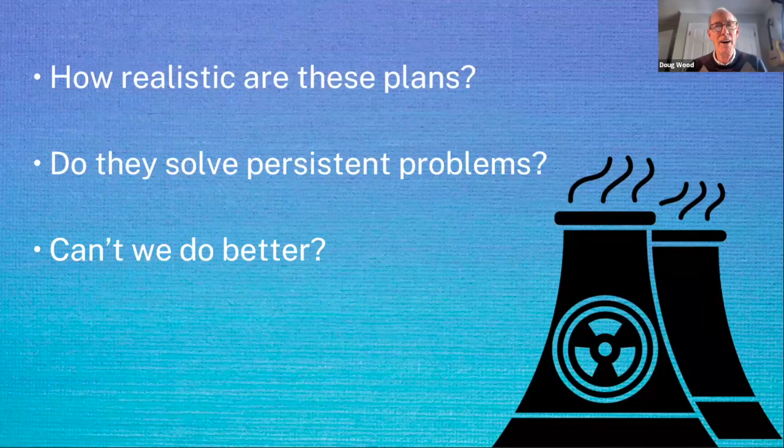This webinar is an opportunity to step back from political talking points and examine the evidence. How realistic are plans for small modular reactors in terms of cost, construction time, or safety? Have any of these new ideas solved the long-term risks that have always plagued nuclear power, like what to do with nuclear waste? Shouldn't we really be talking about better, faster, safer alternatives available to New York that can help us meet our future energy needs without jeopardizing our health, our safety, or our children's future?

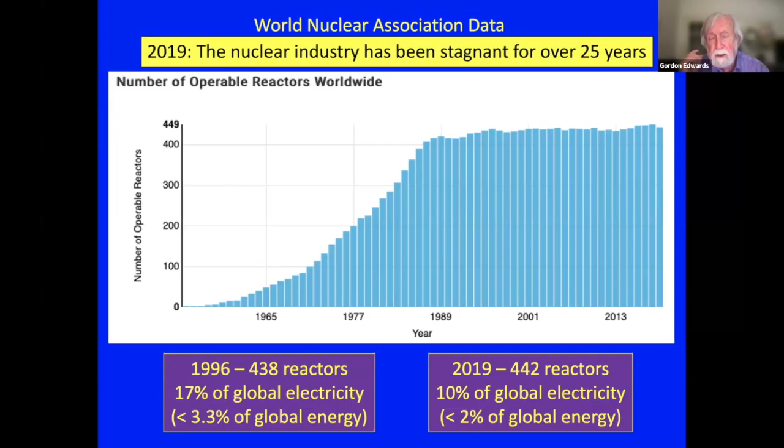And meanwhile, the share of nuclear as a share of global electricity use had declined from 17% to 10%, and now it's gone down to 9%. It's still going down, and nobody expects it to reverse itself anytime soon.

In 2019, the American Society of Mechanical Engineers made a statement: the International Atomic Energy Agency, looking ahead to 2050, sees the most optimistic global electricity market share for nuclear as only about 5%, down from 10% today. In the United States and Europe, it steadily declines to between 3 and 5% of the market, constituting a potential for market failure.

In other words, nuclear can just price itself out of the market altogether. The first nuclear renaissance was around 2001, in response to this sad state of affairs for the nuclear industry. They knew they had to do something to revitalize the industry and get it going again, so they declared there was going to be a nuclear renaissance, with hundreds of new reactors built around the world. But in fact, only a few were ordered, and there was a litany of failures in connection with those attempts.

The bankruptcy of Westinghouse occurred in 2017. They had $9 billion in losses from new nuclear projects, mainly the four AP1000 reactors in Georgia and South Carolina. These were the first reactors to be ordered and licensed for construction in a 30-year period—there had been a 30-year drought up to then. The U.S. federal government had given $8.3 billion in loan guarantees on the financing of the four reactors.

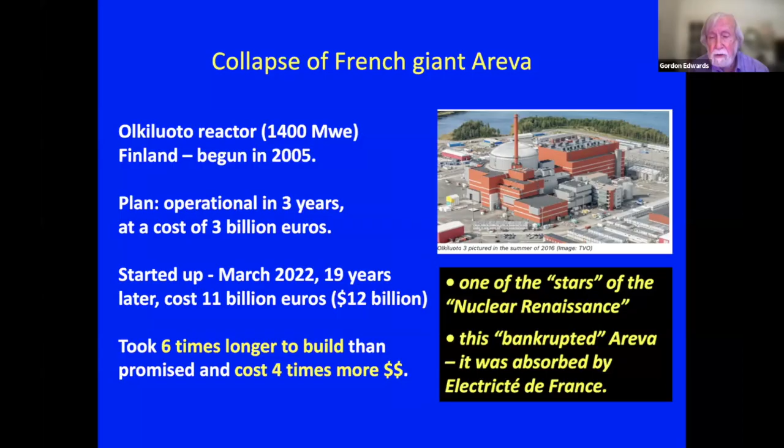This is one of the stars of the nuclear renaissance, and it bankrupted Areva. The company had to be absorbed by Electricité de France.

Let me say a few words about nuclear fission and why certain issues are endemic to it, no matter whether you have a large plant or a small plant, no matter what the technology, fuel, coolant, or design is. There are certain things about nuclear fission which are fundamental.

Henri Becquerel in 1896 discovered radioactivity. He discovered that lumps of uranium ore or thorium ore taken from the ground are radioactive—they give off an invisible ray which will expose photographic plates even if they're wrapped in thick black paper. He didn't understand where this energy came from. You can't see radioactivity, but if you put one of these rocks in a cloud chamber, you can see the condensation tracks of the radioactive emissions given off from uranium or thorium ore.

The amazing thing about this energy pouring off the rock is that it has been going on for millions and millions of years without stopping, 24/7, day and night, constantly pouring out. It wasn't too difficult for scientists to calculate how much energy that was if you added it up over a few thousand years, and it was clear it would be enough to cause major damage to the Earth. And in fact, it did later on.

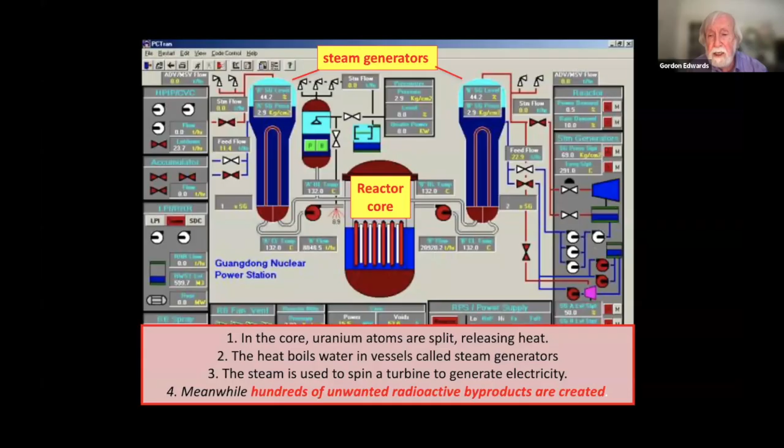Now, it was also discovered that we could harness this energy. We could build a nuclear reactor and keep the chain reaction of uranium going so as to harness the energy to boil a lot of water. That's basically what it is—a way of boiling water and using that steam, just as in a coal-burning or oil-burning plant, to turn the blades of a turbine and generate electricity. The difference is how you boil the water.

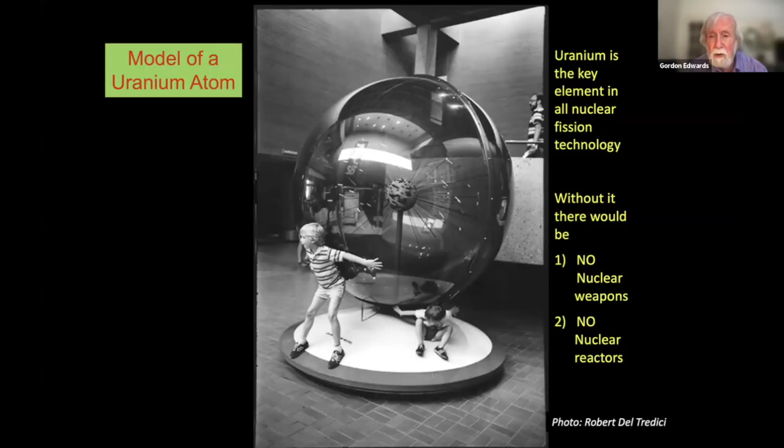Now, uranium turns out to be the key element in all nuclear fission technology. Without uranium, there would be no nuclear weapons of any description and no nuclear reactors of any description. So uranium is the key.

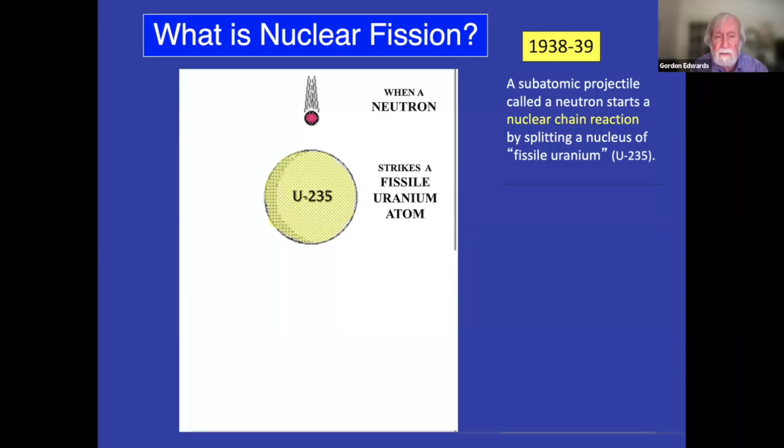And nuclear fission was discovered a lot later, only around Christmas time of 1938, during the holidays between 1938 and '39, when a neutron strikes a fissile uranium atom. That's a rare kind of uranium called uranium-235, only 7 atoms out of 1,000. When you mine uranium out of the ground, 7 atoms out of 1,000 are this type. But that's the kind needed for a nuclear chain reaction, because when a neutron strikes one of these atoms, the atom splits into 2 smaller atoms, which are highly unstable and therefore intensely radioactive.

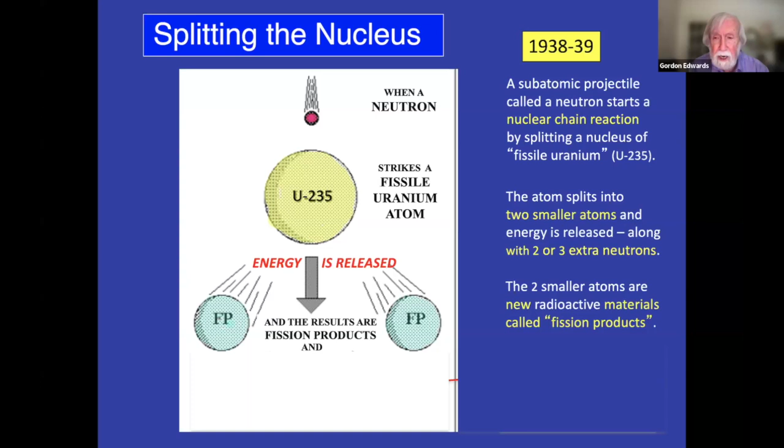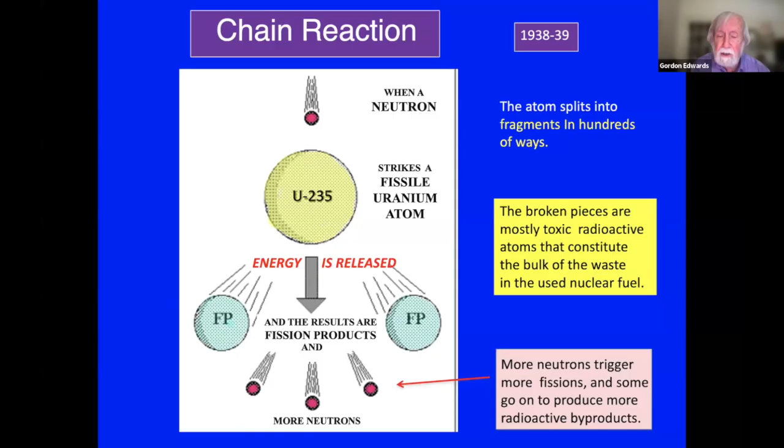The result is energy is released and fission products are created, which are the bulk of the radioactive waste from nuclear reactors, and more neutrons are given off. Those extra neutrons are important because they trigger more fissions and maintain a nuclear chain reaction, whether uncontrolled, as in an atomic bomb, or carefully controlled, as in a nuclear reactor. Some of those neutrons also go on to produce more radioactive byproducts in addition to the fission products. So what do the extra neutrons do?

Well, as I said, they keep producing fission products. Every time an atom splits, you have 2 radioactive byproducts, fission products. But they also turn some of the uranium into plutonium. In fact, the uranium that doesn't split becomes heavier and becomes a transuranic element, which we don't find in nature, called plutonium, americium, neptunium, and a number of other names.

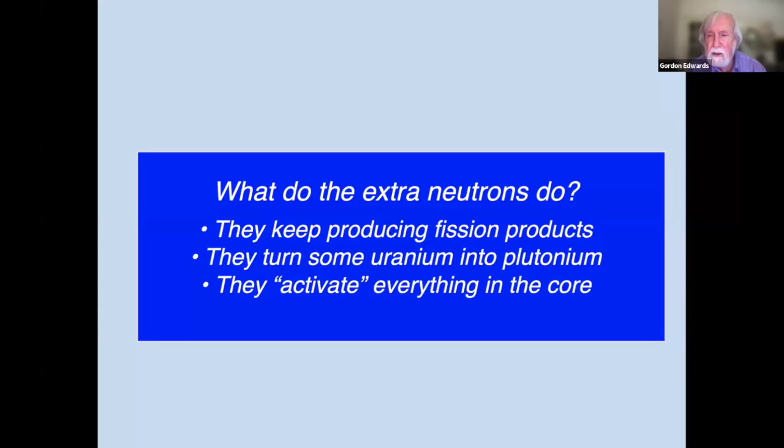In addition, these extra neutrons collide with non-radioactive elements that are just sitting there in the concrete and steel of the reactor itself, and turn those atoms into radioactive atoms. These are called activated atoms. So radioactive atoms are created right in the makeup of the steel and concrete, and that's why decommissioning a nuclear reactor is very difficult.

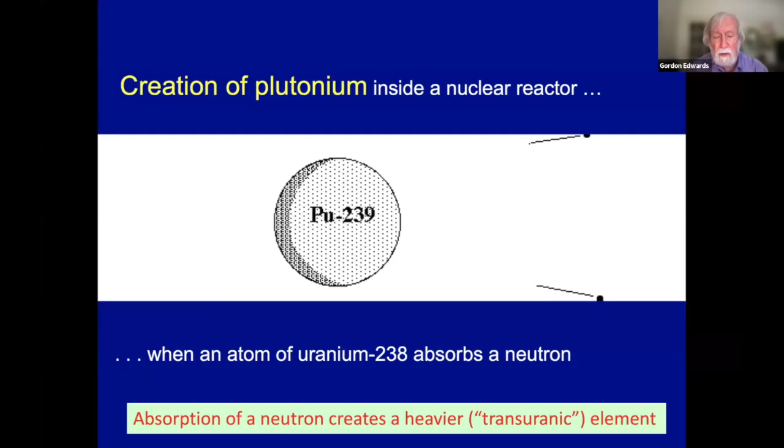But one of the most significant things is that when a neutron hits a uranium-238 atom - uranium-238 being the most abundant type, over 99% of all uranium we mine from the ground - when hit by a neutron, it turns into a heavier than uranium atom called plutonium. And that turns out to be a powerful nuclear explosive. In fact, it's the backbone of all the nuclear arsenals in the world today. So those extra neutrons are very important for people who have nuclear weapons programs.

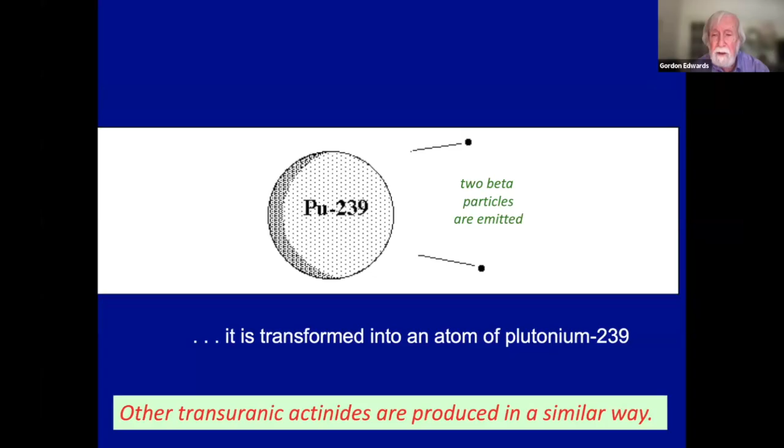That's where they get their plutonium from. In fact, the very first reactors that were ever built were built for the sole purpose of producing plutonium for bombs. Later, it was realized very quickly that plutonium could also be used as another nuclear fuel besides uranium-235.

Now, this glass paperweight is the exact size of the plutonium ball used in the Nagasaki bomb. That's how much plutonium you need to destroy a city - about 6.2 kilograms. It's incredible how much energy is packed into the nucleus of those atoms.

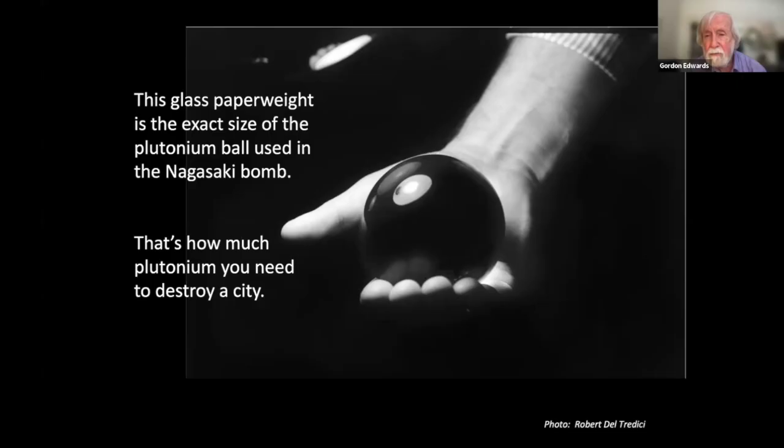The amazing thing is that one of the smallest things you can possibly imagine, the nucleus of an atom, extremely tiny, contains the most powerful force in the universe, which is the nuclear force. And it's liberating that nuclear force that is the secret of nuclear energy.

Now, here's a picture of Howard Morland, a journalist who wrote an article about making an H-bomb, a hydrogen bomb. You'll see that even in the most sophisticated nuclear weapons, there is still a ball of plutonium necessary. This is a fusion thermonuclear weapon that uses fusion, but that ball of plutonium at the top is needed to get the temperature up to 100 million degrees, which is necessary to get the fusion started.

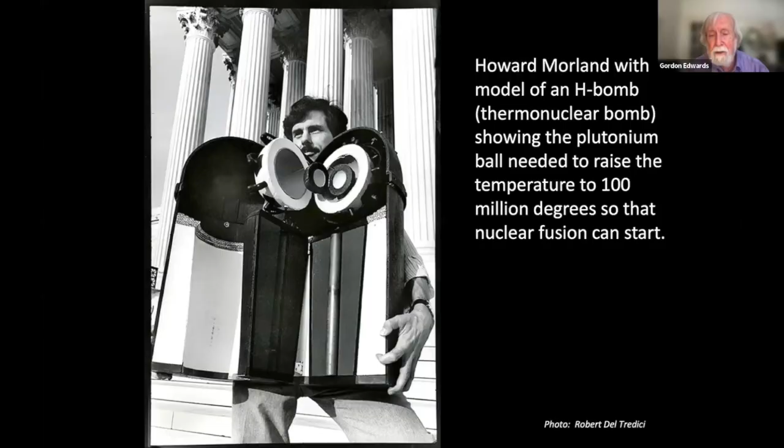So what are the activation products? When a stray neutron is absorbed by a non-radioactive atom, the result is often a radioactive atom. It's called an activation product.

For example, here in Canada, we use a heavy type of hydrogen called deuterium. It's not radioactive, but when it absorbs a neutron, it turns into an atom of tritium, which is radioactive. These are isotopes, varieties of hydrogen. Hydrogen is the most abundant atom in the entire universe, the most abundant substance, and fundamental to all living things. Tritium is the radioactive form of hydrogen, and a great deal of it is made in nuclear reactors and in nuclear explosions.

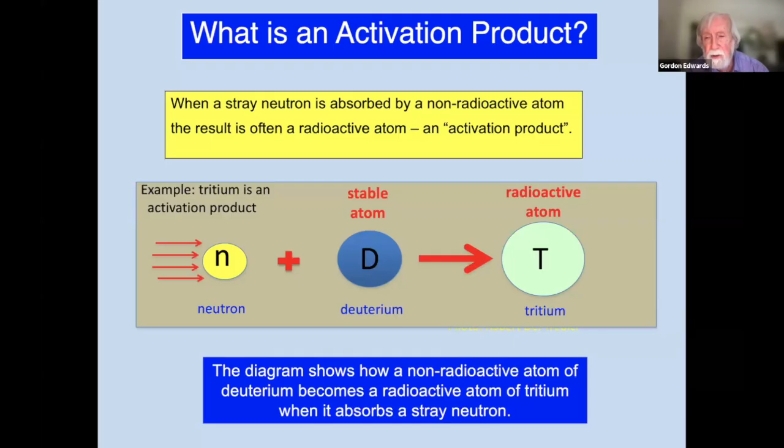Some of it also comes from nature in the form of cosmic radiation from outer space. So there is a background level of tritium, but what is produced here is man-made.

Water is activated and produces radioactive tritium. Air is activated and produces radioactive carbon-14, and all organic molecules have carbon and hydrogen in them. So these radioactive varieties become incorporated into our DNA. Those carbon atoms and those hydrogen atoms can be easily replaced by the radioactive varieties. So we can have this radioactivity right into our own organic molecules.

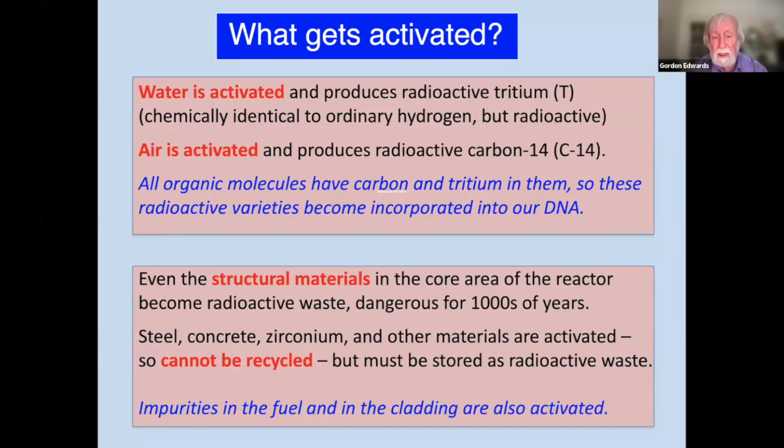Even the structural materials in the core area of the reactor become radioactive waste, dangerous for thousands of years—steel, concrete, zirconium. So they cannot be recycled, but must be stored forever as radioactive waste.

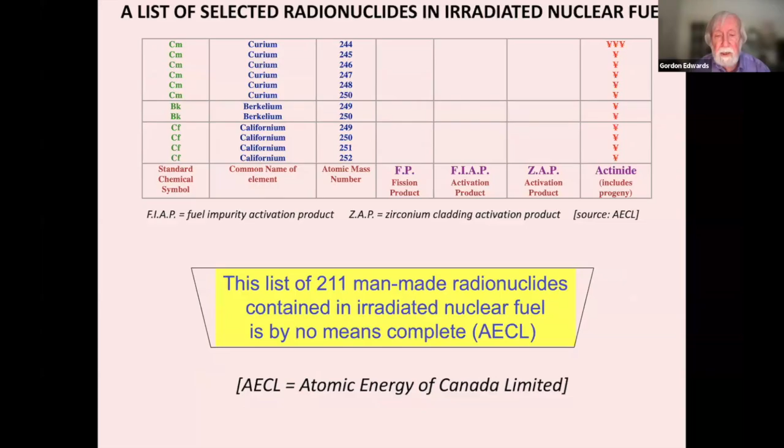This list of 211 man-made radionuclides contained in irradiated fuel is by no means complete, according to Atomic Energy of Canada Limited. And by the way, the radioactivity is so intense that if you wanted to dissolve just one year's radioactive waste from one nuclear reactor, you'd need an amount of water about the volume of Lake Superior to dissolve that amount of spent fuel—called irradiated nuclear fuel—to the maximum levels of contamination for drinking water allowed by law.

So that's why this is a very serious problem. And even after 1 million years and even after 10 million years, the amount of water needed is still very considerable. The U.S. Geological Survey pointed out that even after 1 million years, you'd still need about all the water in the Great Lakes to dissolve the waste from American reactors to the maximum level of contamination allowed.

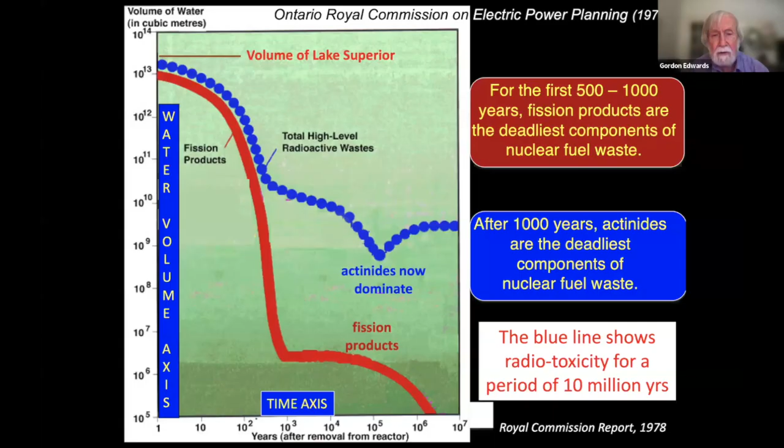So the second nuclear renaissance began around 2018, with small modular reactors. The idea the nuclear industry had was that the first attempt to revitalize the industry was not a success—it was a fiasco. So let's try again. Maybe the big reactors are too expensive, maybe we should try small ones, maybe that'll work better.

But the small modular reactors are really a kind of a logo, a slogan. It doesn't have a precise definition. It's really a grab bag to cover hundreds of different designs. In fact, there are over 130 different designs on the market right now ready for people to develop.

So the rationale for small modular nuclear reactors was partly because large reactors are too expensive to finance for many jurisdictions, and they're also too powerful for small grids in some countries. SMRs are smaller, they can be modular for mass production. By making them smaller, you also make them more expensive, but maybe if we mass produce them, we can lower the cost down to where it's affordable again.

SMRs can also deliver heat as well as electricity. They can be a little more flexible—you can also store that heat for flexible usage. Of course, you could do that with large reactors too, but they wanted different ways of marketing small modular reactors. One line they use is that small modular reactors can serve as backups for renewables, because renewables are intermittent or variable.

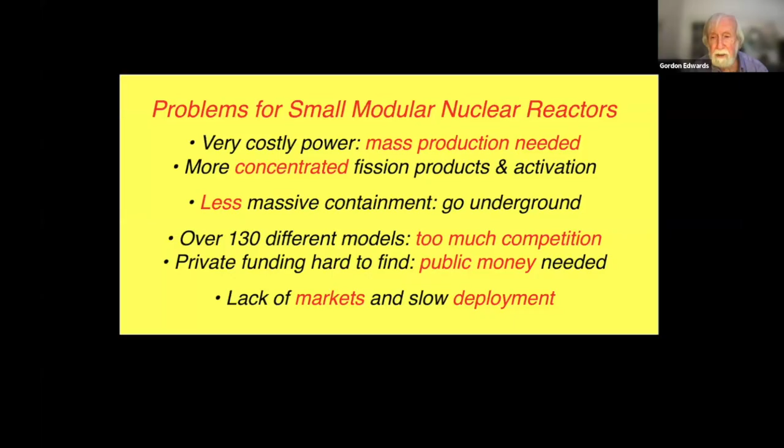The big problem, however, is there's too much competition. There's no single design that can dominate the market enough to make it cheap and justify mass producing them. Public money is needed because private funding is very hard to find. Lack of markets and slow deployment - these are big problems.

Here's an example, the NuScale Power Modular Reactor, the NuScale Power Module. It's licensed for construction in the USA, but when projected power costs rose sharply, the clients down in Utah, the UAMPS people, backed out of it. That project was canceled in 2023. It looked like it was going somewhere, but it got canceled.

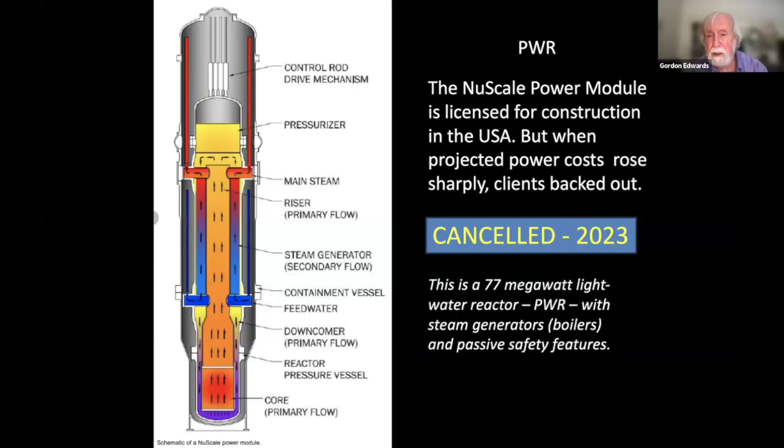This is a 77 megawatt light water reactor, a PWR, pressurized water reactor with steam generators, boilers, and passive safety features. Passive safety features don't depend upon electricity supply, so you don't need pumps running to keep the core from melting by removing the so-called decay heat.

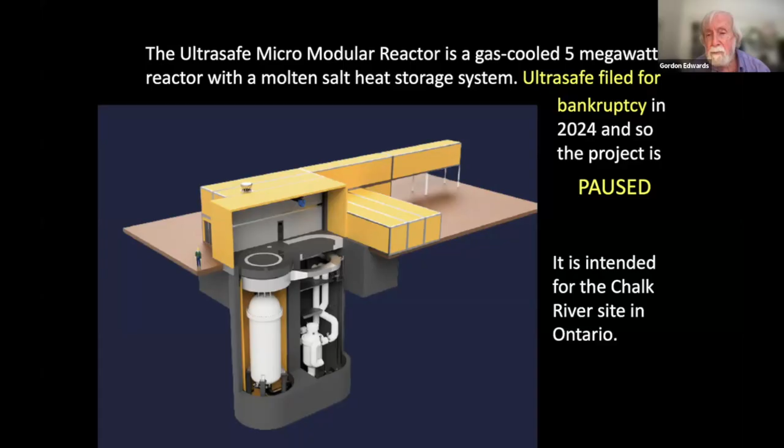Here's another called a micromodular reactor by the Ultrasafe Nuclear Corporation. It's a gas-cooled 5 megawatt reactor with a molten salt heat storage system. It was supposed to be built in Canada, just north of the nation's capital on the Ottawa River, at what's called the Chalk River site in Ontario. But Ultrasafe Corporation filed for bankruptcy in 2024, and so this project is paused indefinitely.

The BWRX-300 is a boiling water reactor that doesn't require steam generators. The water is allowed to boil right in the core of the reactor, and then the steam is used to generate electricity. It's a 300 megawatt plant, estimated to cost 6.5 billion Canadian dollars to build. That's equal to the cost per megawatt of the Vogtle plants, which were regarded as the most expensive electricity capacity ever built.

So we're not talking about cheap, we're talking about very expensive power. It's under construction because they've got a construction license from the Canadian regulator for the first of 4 units to be built east of Toronto at Darlington on Lake Ontario.

Now, if you take a closer look at the design, you'll see that it's bigger than you think. It's actually 21 stories high - 10 stories above ground and another 11 stories below ground. So calling this a small modular reactor is a bit of a stretch. It doesn't seem very small.

Also, it's not so modular either. It's the first of a kind, so it's going to be put together by hand. A workforce of up to 4,000 has been cited by the Prime Minister, who has invested federal money in it as well. So this is really not small and it's not modular, but it is nuclear.

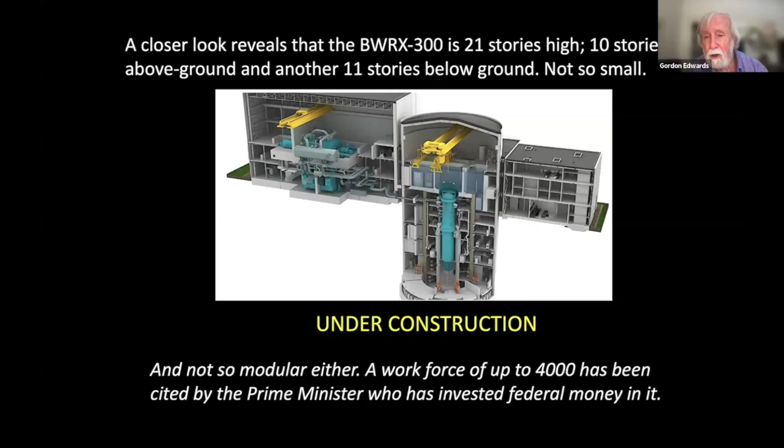And the funny thing is, that's the one thing they leave out of their acronym. They call them SMRs, not SMNRs - they leave out the N. The S, small, is debatable. The M, modular, is also debatable. The nuclear is not debatable, but it's not there. Maybe that's because they don't want to call attention to the fact that nuclear is where all the problems really lie.

Now, the BWRX 300, as I mentioned, is based upon an earlier version which was licensed to be built but never built, in 2011. That's the same year the Fukushima reactors melted down. They were also boiling water reactors in the same evolutionary line as these other ones.

So what they did was take the ESBWR, called the economic simplified boiling water reactor, and remove a great deal of the safety systems in order to shrink it down. They got a smaller reactor, the BWRX 300, but the price they paid is eliminating many safety systems, including the emergency core cooling system and the core catcher, which in case of a meltdown would spread the core and prevent it from melting through the bottom of the reactor.

They got rid of that. They also got rid of the pressure relief valves in the core of the reactor. This means if the pressure builds up, they can't relieve it by opening a valve. They're going to relieve it a different way using what's called a isolation condenser system.

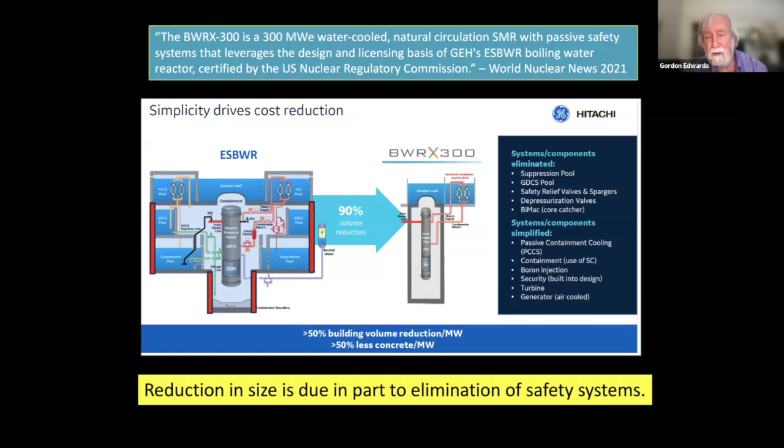So this is a passive system. It's not a complete design. Everybody has acknowledged that it's still not a complete design, but they're building it anyway.

So the nuclear fission by itself raises several problems. The first problem is the nuclear waste. That's going to be a problem for many thousands or even millions of years.

Problem number two is the possibility of a nuclear catastrophe. Nuclear catastrophes cannot be completely avoided because a nuclear catastrophe is simply releasing the radioactive materials that already exist inside the reactor. When the uranium atoms are split, you have all those fission products building up, and they're there. There's nothing you can do about it. You can't wish them out of existence. Anything that releases that material into the environment is going to be catastrophic for the neighboring environment. And so that's what nuclear catastrophes are.

This could happen by, for example, dropping a bomb on it. It's been pointed out by nuclear physicists in Britain that if you had developed nuclear power before World War II, then large parts of Europe would be uninhabitable today because those plants would have undoubtedly been targeted. You would have massive releases with powerful bombs. And of course, sabotage as well.

Then we have problem number three, nuclear decommissioning. That's what to do with all the structural materials which have become radioactive waste. You can't recycle them. For this reason, nuclear power is sometimes described as the ultimate throwaway society, because you can't reuse that material.

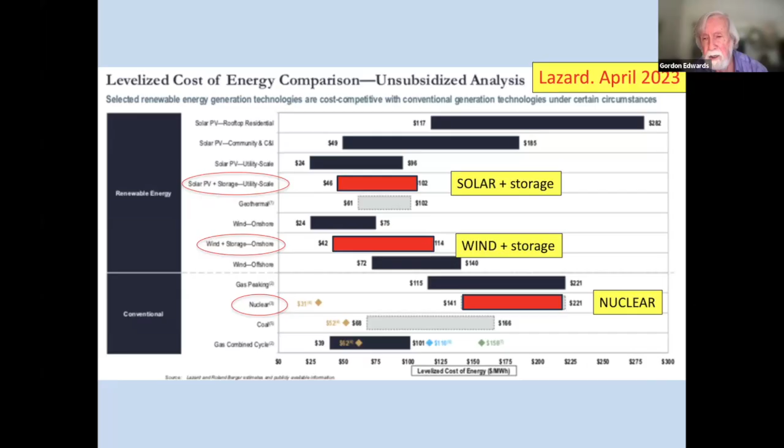One of the big problems the nuclear industry has with marketing its small modular reactors is that solar and wind are so much cheaper, even with storage. And every year, solar and wind get cheaper and cheaper, while nuclear gets more and more expensive. Storage is also getting cheaper and cheaper, so it's a double whammy—the poor nuclear guys are facing stiff competition. In fact, solar and wind are growing at an exponential rate worldwide, far faster than anything happening in the nuclear domain.

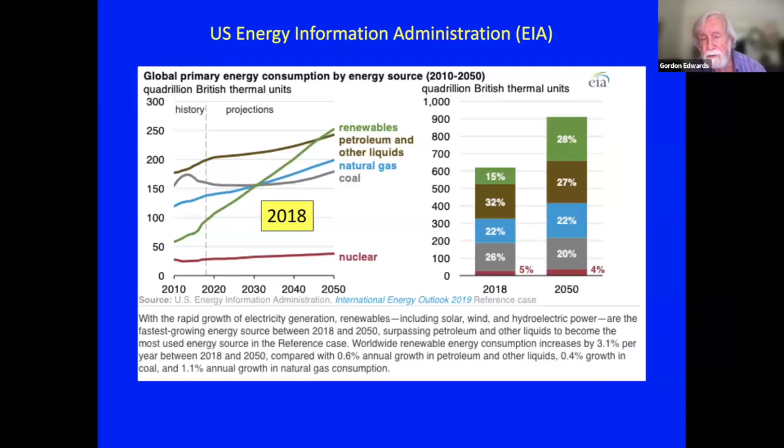That's true worldwide. At COP28 in 2023, over 200 nations pledged to triple renewable energy and double energy efficiency by 2030. Meanwhile, the nuclear industry got together and 25 of them made an unofficial pledge among themselves to triple nuclear power by 2050. Notice that's 20 years later, and it's much less achievable than tripling renewable energy by 2030.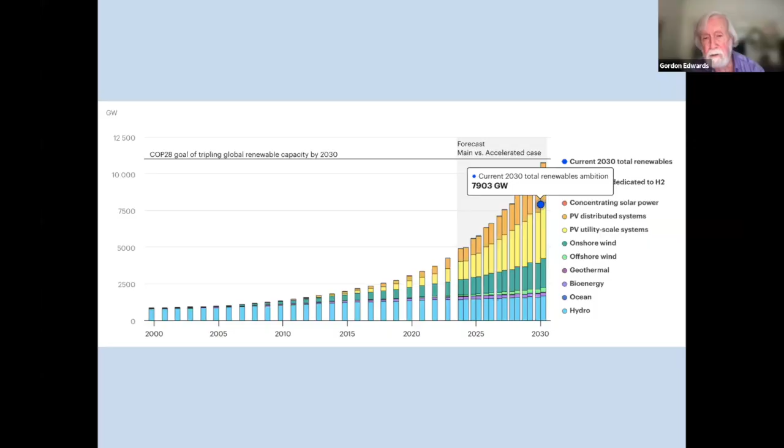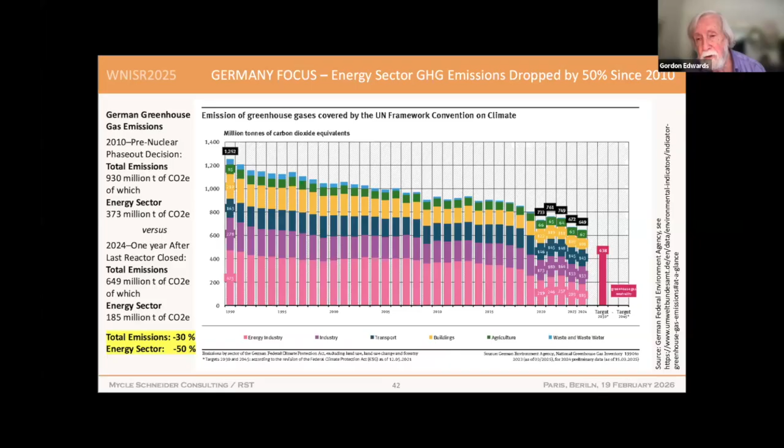Meanwhile, people often say if you phase out nuclear, if you devalue nuclear, then you're going to have rising greenhouse gases and more climate change. But Germany shut down all 17 of its nuclear reactors, on time, on schedule, and they have been reducing their greenhouse gas emissions while phasing out nuclear power. Part of the reason is because they phased in a good deal of energy efficiency, which is the cheapest way to offset greenhouse gas emissions, and renewables, which are the next cheapest way. So they're doing okay.

Now let's talk about advanced reactors. Molten salt coolant, first of all. I believe they've talked about using molten salt coolant possibly in New York. The original molten salt coolant reactor was designed for airplane engines. They wanted to make airplane engines nuclear powered. This is way back in the 50s. Here are two abandoned airplane engines that are nuclear and are molten salt reactors. Those are the original molten salt reactors.

It was canceled in 1961 by President Kennedy, who saw that it was an enormous waste of money, with no sign of it reaching completion or of reaching an end to the escalating cost. So he just terminated it.

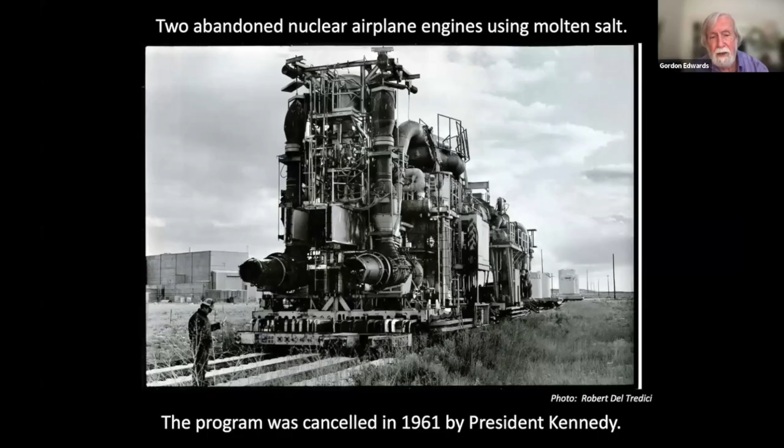Now, Alvin Weinberg, who was at the Oak Ridge National Laboratory, took over the project—he was in charge of it to begin with. He moved the whole operation to Oak Ridge and built a molten salt reactor experiment there. This ran for about 5 years in the 1960s, and it used plutonium as fuel, weapons-grade uranium as fuel, and eventually something called uranium-233, which doesn't occur in nature. I'll talk about that later.

Now in 2017, there was a news article saying the contaminated molten salt reactor experiment may have to be entombed in concrete because they don't know what to do with it. All of the molten salt is thoroughly contaminated with radioactivity, full of fission products. It's highly radioactive, highly corrosive, and they really don't know what to do with it. They still have not dealt with that problem—it's an ongoing problem.

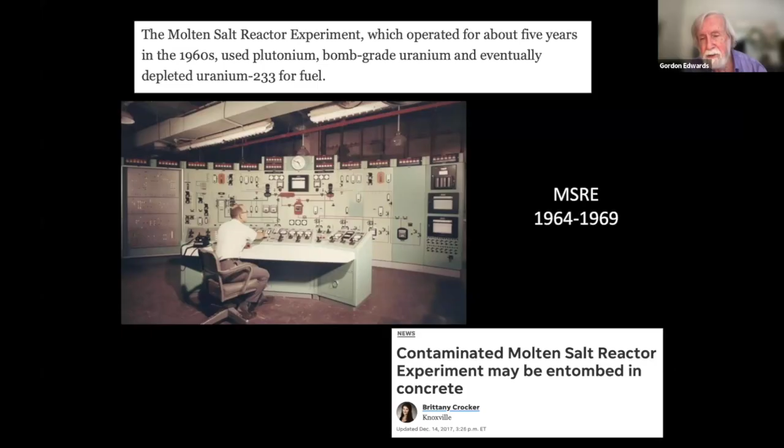So another advanced concept is liquid sodium metal coolant. The first one was the experimental breeder reactor down in Idaho, run by Argonne National Laboratory. A breeder reactor is a reactor that makes more fuel than it uses. Now, how is that possible?

Well, they're talking about plutonium. If you surround a plutonium-fueled reactor with a blanket of uranium-238, the stray neutrons turn the uranium-238 into plutonium. If you play your cards right, you might get a little more plutonium out of that than you put into it. So you could use a certain amount of plutonium as fuel originally and get a little more out at the end of the day. You'd have to reprocess that spent fuel to extract the plutonium so you could reuse it as fuel.

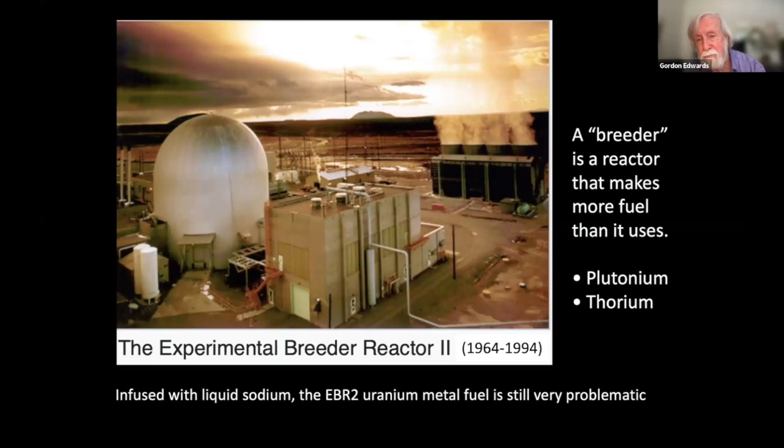Now, there's a great problem with the fuel from that reactor because it's infused with liquid sodium, and they can't get it out very easily. They can't bury it underground because contact with water will make it undergo a violent chemical reaction. So it's a real problem—this fuel is even more difficult to bury than the submarine fuel because of the sodium.

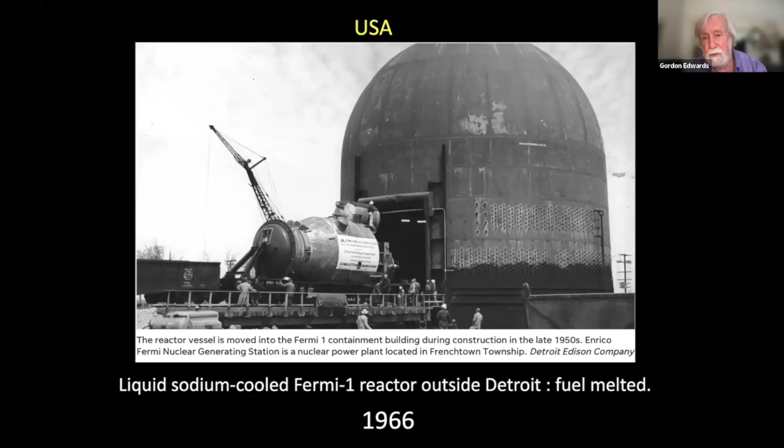Here is the liquid sodium cooled Fermi 1 reactor outside of Detroit. It melted in 1966. Some of the fuel melted, only a few rods, but that was enough to make it a complete fiasco and a complete shutdown. It was fueled with weapons grade uranium, not plutonium, but it was intended to breed plutonium through the same method I was referring to, catching those stray neutrons on a blanket of uranium-238. It's completely shut down, and it's joined the ranks of the cripples in history, the nuclear cripples.

Now, the Superphénix in France is a large, over 1,000 megawatt breeder reactor, sodium cooled, widely considered a technological and economic failure due to extreme costs, approximately 9 billion euros, immense political pressure, and poor reliability. It operated for only a fraction of its lifetime, roughly 12 months in 10 years. That's not a very good performance record. So it was a technical fiasco and an economic fiasco, and it was never repeated since.

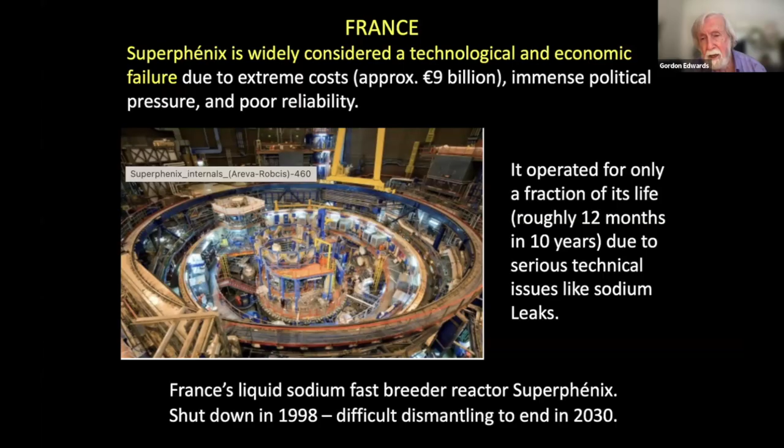Although that doesn't mean that France has lost interest in breeders. The nuclear countries are generally interested in breeders for the future.

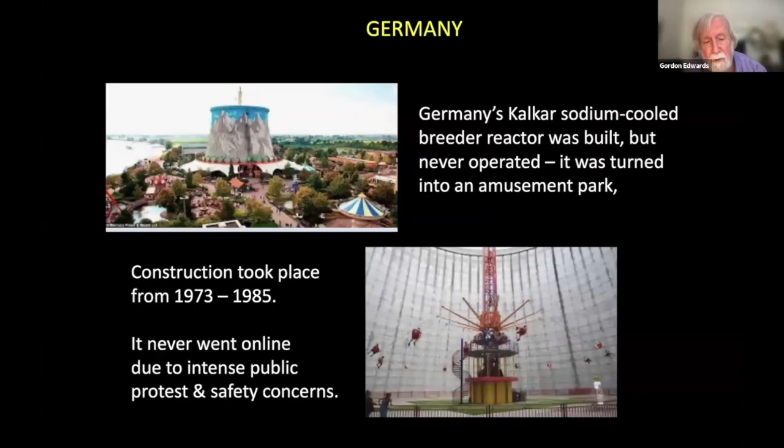Germany actually completed building a sodium-cooled reactor, but looking at the experience of France, they decided never to operate it. They simply decided to shut it down, even though it was complete, and they turned it into an amusement park. Construction took place from 1973 to 1985. It cost about $4 billion to build, and it never went online at all due to intense public protests and safety concerns. In Japan, the sodium-cooled Monju breeder reactor only operated for less than a year in 3 decades.

And now they're scrapping the Monju. The curtain falls on Japan's experimental fast breeder reactor. It's finally pulled the plug, and it's been plagued by accidents, cover-ups, and cost overruns. That's an article about it.

Now in Britain, they had a nuclear reactor that actually ran for a certain period of time, from the 1950s way up to 1994. It was active during that period, not always at full power, of course. The Dounreay nuclear breeder is considered a technical success for pioneering fast reactor technology, but it's an environmental and operational failure due to significant radioactive contamination, safety breaches, high decommissioning costs, and it spewed fuel particles onto nearby beaches. These fuel particles are called nuclear fleas, and they're extremely radioactive. It's spent fuel in miniature, little particles of spent fuel.

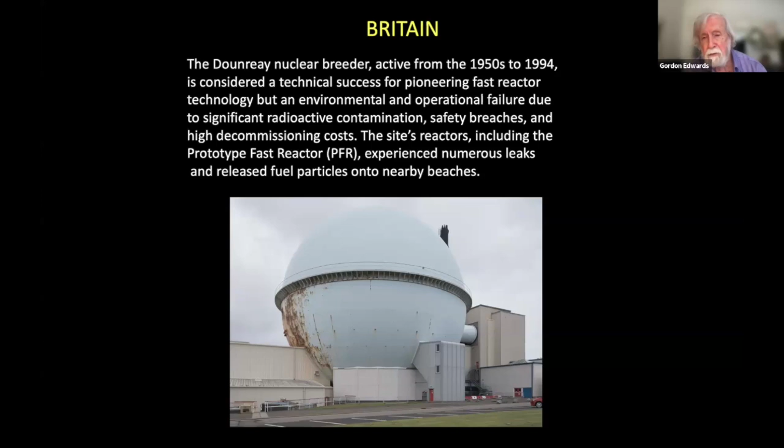Now in New Brunswick, just in the last few years, the ARC 100 reactor is a liquid sodium metal cooled fast reactor with low enriched uranium. It's called HALEU, meaning it's much more highly enriched than regular fuel, but not over 20%. Once you get over 20%, you get into the weapons usable domain, and they want to keep it not weapons usable. However, recent articles in Science magazine have pointed out that even this HALEU fuel, which is underneath 20%, could still be used to make nuclear explosives. So it's a problem here of nuclear proliferation again.

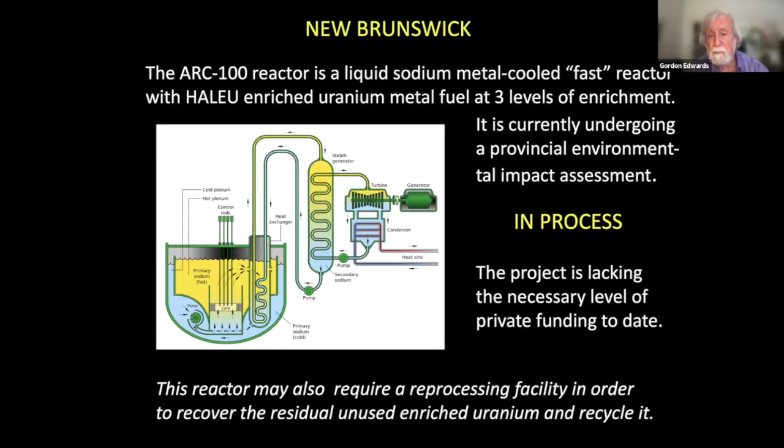They wanted to build it. It's in process, but the project is lacking the necessary level of private funding. And we believe it'll never get built.

New Brunswick also has a waste burning reactor, the Moltex reactor. It's a molten salt reactor fueled with plutonium and other actinides extracted from used fuel already stored on site in New Brunswick. That's in limbo. It may not be built either, but it is going right through an environmental assessment at the moment. So who knows? It may be built.

That is a possibility. No, excuse me, I mixed up. This one is not going through an environmental assessment, this one is in limbo. The one that's going through an environmental assessment is the one I talked about in the previous slide, the liquid sodium cooled one.

In Saskatchewan, they're looking at another small modular reactor called the eVinci reactor. It uses uranium at the highest level of enrichment allowed for civilian purposes, 19.76% U-235. We are assured by nuclear scientists, even those who work at Los Alamos in the weapons department, that that stuff could be used to make atomic bombs. Not efficiently, they would be very heavy. They'd have to be delivered in the hull of a ship or in a container type of thing because they would be big, but they would be very powerful nonetheless.

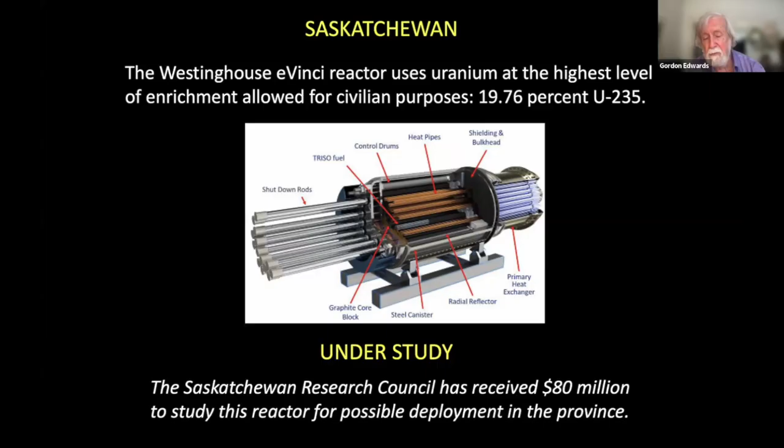So this is the one that I went back to.

Now the enrichment of uranium, if you look at this diagram, the red corresponds to the chain reacting type of uranium, which is uranium-235. The gray squares are the uranium which is not chain reacting. Right now we're using only one square of red, about 0.7% enriched. 5% enriched would be the six squares in the next diagram. That's low enriched uranium, less than 20%, typically 3 to 5%.

Now, highly enriched uranium goes all the way up to 20% uranium-235 and above, and that's a no-no for civilian use. But as I said, when you go to the low enriched uranium, which is HALEU, that's the second chart there, that is already 85% of the way towards weapons grade. So it's getting very close.

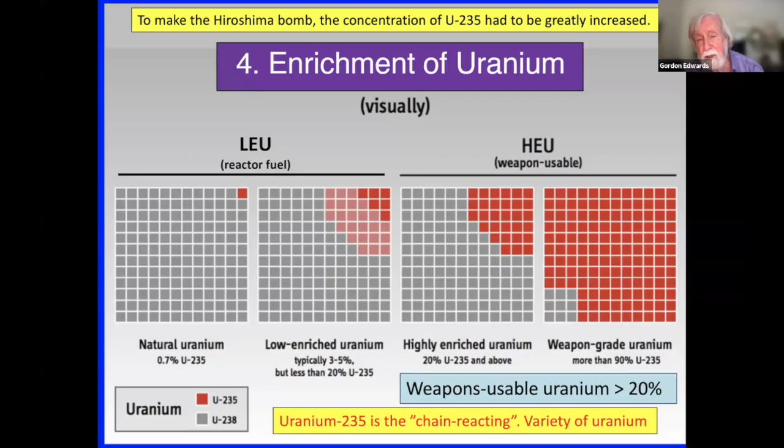It's making it easier—if we sell these reactors to other countries, it'll be a lot easier for them to go the rest of the way to weapons grade. You know what's happening in Iran right now with their enrichment, right? Enrichment is a very sensitive technology. Why? Because you can enrich it all the way up to weapons grade, and you can make atomic bombs that are quite low-tech bombs.

So reprocessing, which was mentioned earlier about recycling the used fuel, is not a good idea for proliferation reasons, because right now there's what I call a firewall, a radioactive firewall between the bomb and the reactor.

The reason is that the spent fuel, the irradiated fuel, is so radioactive that when it's freshly out of the reactor, it would kill any human being in 20 seconds at a distance of 1 meter unless they were heavily shielded. It does get less radioactive as time goes on, but even after 30 years, it's still very dangerous to handle because of the penetrating radiation that comes off it.

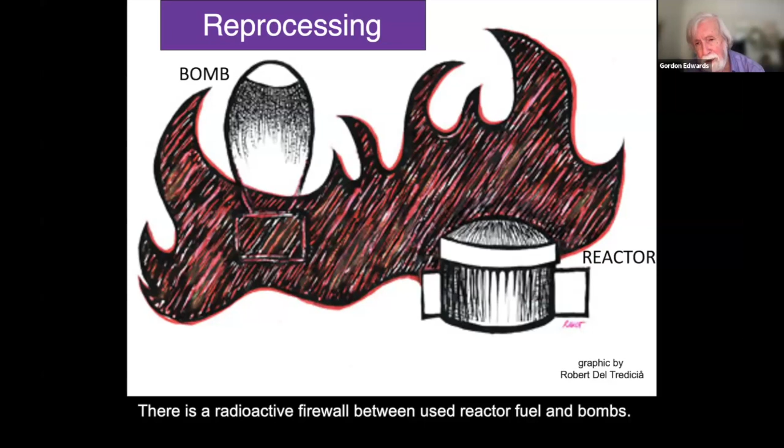So that radioactivity acts as a protection—you can't just take a fuel bundle out of a reactor and go make a bomb out of it. You die before you get there.

However, if you build a reprocessing plant, what you do is you remove that radioactive barrier and you make the plutonium readily accessible. It can go out the front door as reactor fuel, but it can also go out the back door for weapons. And that's the danger of reprocessing.

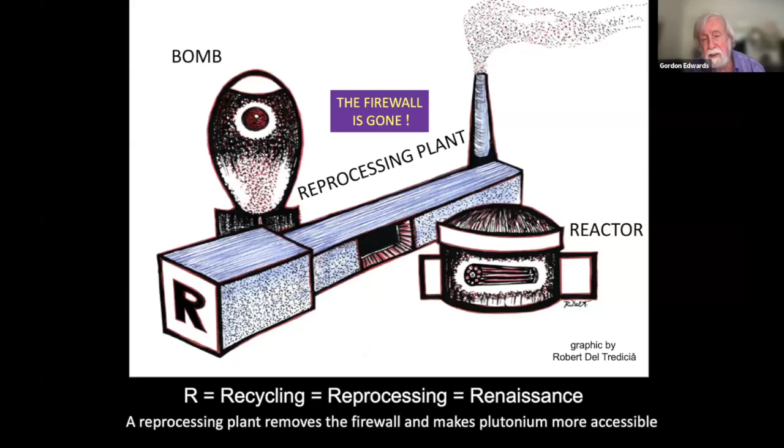That's why President Jimmy Carter banned plutonium reprocessing in the United States for civilian purposes for that very reason. He tried to get that ban extended worldwide for the same reason. He was unsuccessful doing it worldwide, but he was successful in stopping it in the USA.

So let's turn to another advanced concept, using thorium as a fuel. Some people are advocates of thorium, and I hear that even in New York State, thorium has been mentioned as an attractive alternative. I'll be frank with you, thorium does have some advantages—there's no doubt. It's 3 times as abundant as uranium. That's one advantage.

But it's not really a fuel. Unlike uranium, it's not a fuel. If you put thorium into a nuclear reactor and turn the switch, nothing happens, because you have to have something else as fuel—either uranium-235 or plutonium. So even before you start a thorium reactor, you have to have access to weapons materials.

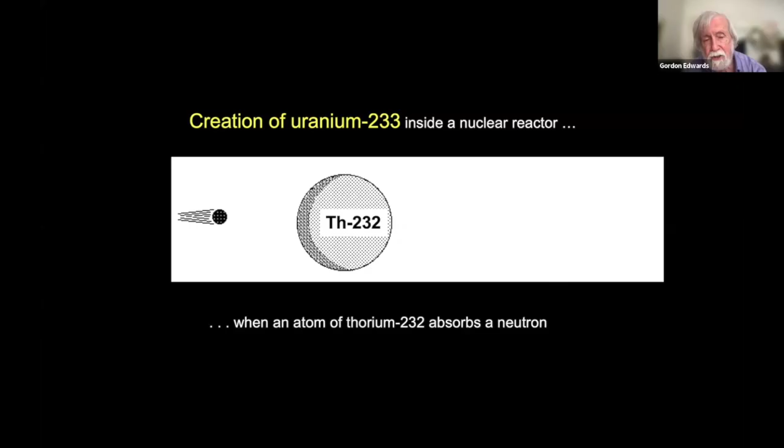That's why reprocessing is a no-no. The advanced concept of using thorium as a fuel has a similar problem, because when a thorium atom, which is not able to undergo a chain reaction, is struck by a neutron, it changes into another material, uranium-233. And uranium-233 is an excellent nuclear weapons material—an excellent nuclear explosive.

And that's the problem with using thorium as a fuel: you create another nuclear weapons material. That U-233 can also be used as fuel for a nuclear reactor, but again, the only way to get it out of the spent fuel is by reprocessing. And when you reprocess, you make that weapons-usable material more accessible to anybody who wants to use it for good or for ill.

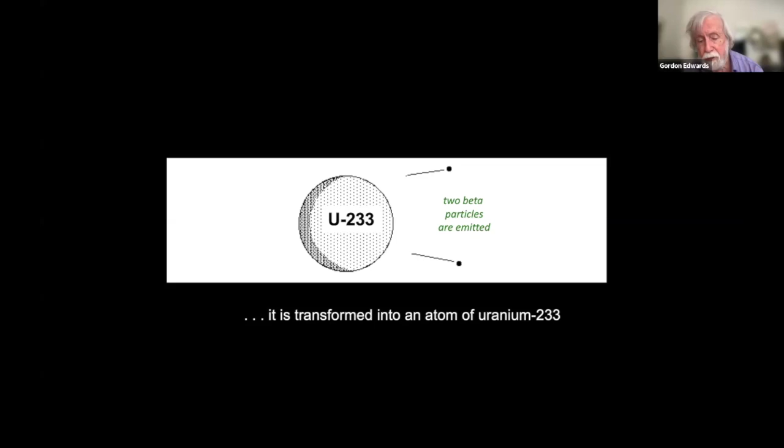The nature of the beast is, first of all, nuclear fusion is a lot more powerful than nuclear fission. Now, what is nuclear fusion? In both cases we're talking about nuclear energy, and it's called that because it comes from the nucleus of the atom. It's amazing that the smallest thing we can imagine, the nucleus of an atom, contains the strongest force in the universe, the nuclear force.

One way of getting nuclear energy is by splitting heavy atoms like uranium or plutonium - that's nuclear fission. Another way is by combining light atoms into bigger ones, mostly hydrogen atoms, which is why it's called the H-bomb. The hydrogen bomb can go up to 15 megatons instead of 15,000 tons of TNT, which is the Hiroshima bomb - it could be 1,000 times more powerful.

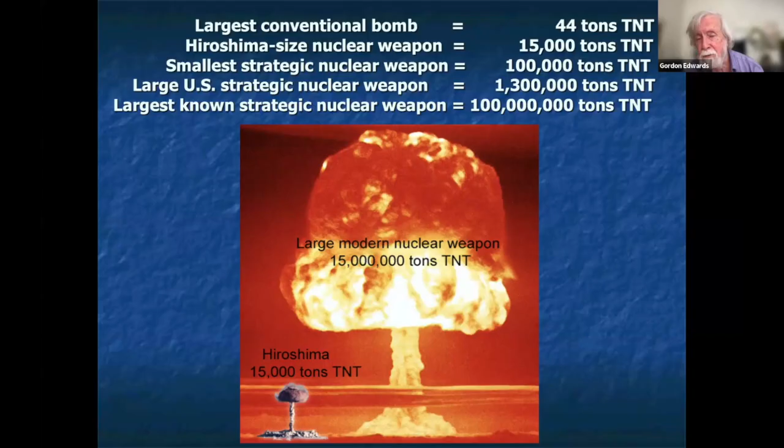But you've got to get it going. Remember, the only way you can get that temperature of 100 million degrees to start the fusion reaction is by using a plutonium ball. A small plutonium bomb gets it up to the fusion area.

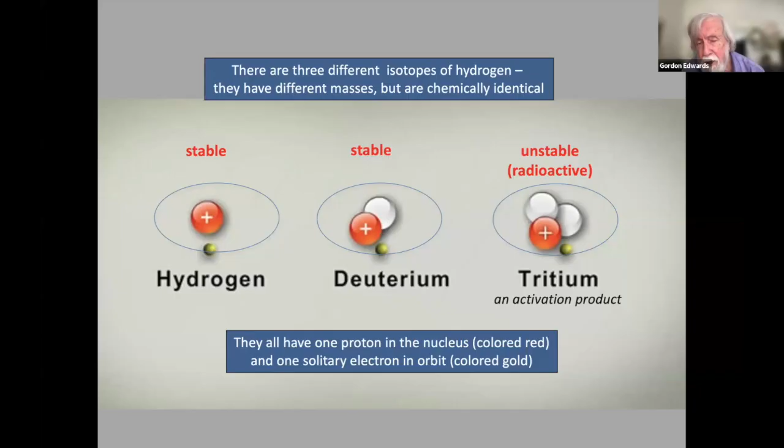There are three different isotopes of hydrogen, three different varieties. They have different masses but are chemically identical. There's ordinary hydrogen, then heavy hydrogen called deuterium, which is not radioactive. Then there's tritium, three times heavier than normal hydrogen, and it is the only radioactive isotope of hydrogen. These are the atoms they fuse together to create fusion energy.

They have to give a lot of heat to get those atoms to even come together. The reason is because they're both positively charged and repel one another like magnets pushing each other away. So you need a lot of energy to get them together, and the way they get that energy is by increasing the temperature to 100 million degrees, so they can come into direct contact and fuse.

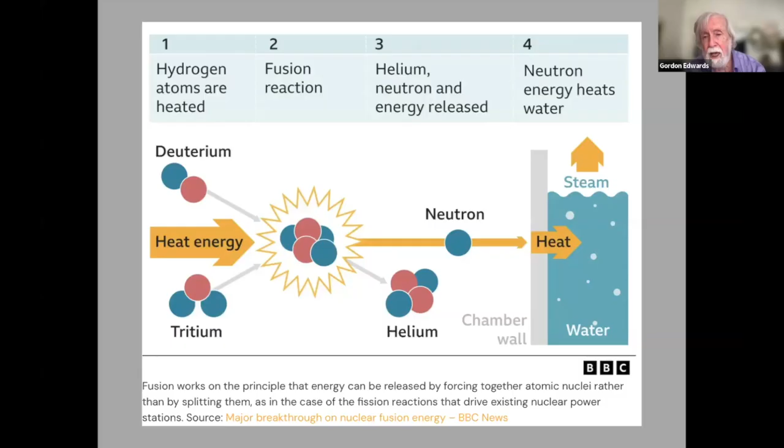They fuse into a different element called a helium atom. Now, it's all due to Albert Einstein in 1905, when he was working as a patent clerk because he couldn't get a job as a physicist. In his spare time he worked out that E equals mc squared and published it in a physics journal. E is energy, m is mass, and c squared is the speed of light squared.

That c squared is 90 quadrillion - that's 90 billion million. If you multiply even a small amount of mass by that number, you get a huge amount of energy. The Bulletin of Atomic Scientists calculated that the amount of mass converted to energy in the Hiroshima bombing was about the weight of a butterfly's wing. That's how much mass was converted into energy, because of that enormous factor, c squared.

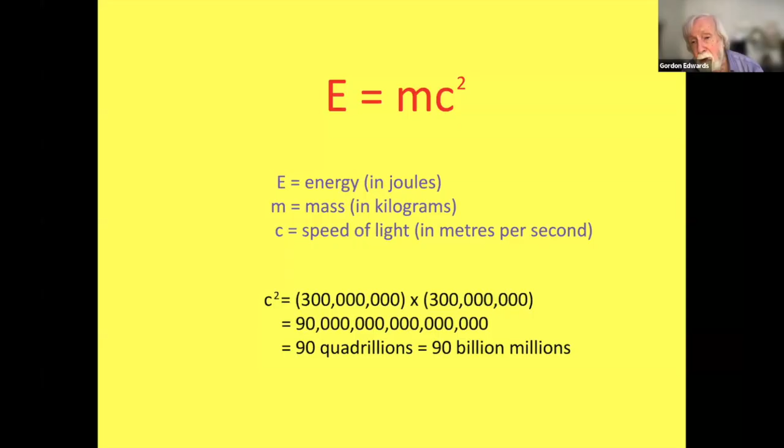It turns out the same thing happens with fusion. When you put hydrogen atoms together into a larger atom, you lose a tiny bit of mass - the end product weighs a little less than the constituents that went into it. That lost mass is converted into energy, and that's fusion energy. It's a lot more than fission energy - a far more energetic reaction.

Facts about fusion: the temperature has to be over 100 million degrees. Containment has to be non-material, because any material would melt or disintegrate at that temperature. That's why they use electromagnetic forces, a kind of electromagnetic bottle called a tokamak - a donut-shaped electromagnetic bottle that can keep the fusion fuel contained.

It's called a plasma, and that plasma is already at a very high temperature. When fusion occurs, neutrons are released which are much more energetic than fission neutrons—we're talking about 14 million electron volts instead of 2 million. So they're much more energetic neutrons.

That means activation and embrittlement are serious limitations on fusion reactors. Remember I talked about how when neutrons hit non-radioactive materials, it makes them radioactive? It also makes them brittle, and that's what happens here.

And activation and embrittlement are going to be serious technical problems. Large amounts of tritium are released to the environment as well—that's an environmental problem. But the big advantage is there's no fission products, no actinides produced... or are there? They could decide to use a uranium blanket to produce plutonium from a fusion reactor using those neutrons instead of fission neutrons. They're not likely to do it in the near future, but you can imagine how they could make weapons-grade fission material using a fusion reaction.

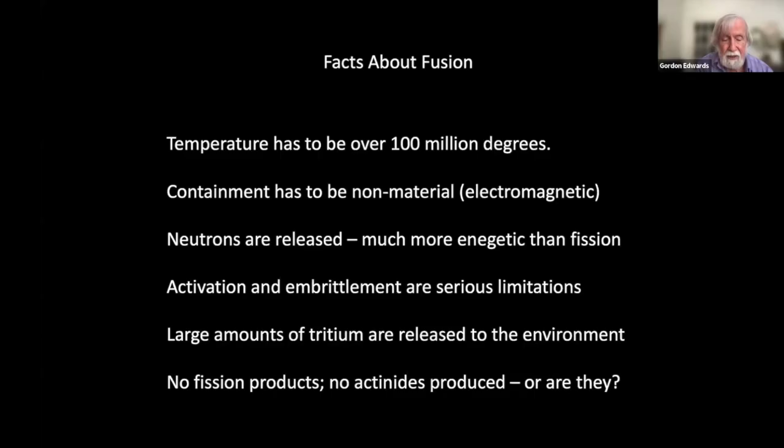That's a giant step forward, made in France at WEST, which is an abbreviation for their tokamak. The previous record was about 17 minutes and 46 seconds, from China at the EAST tokamak—that's an abbreviation for their tokamak.

Before 2024, the record length for a fusion reaction was 101 seconds. So we're nowhere near to having commercially available fusion. And anybody who tells you that we are is selling you a bill of goods.

I have a bridge they could buy. But it is a very exciting field of research, and one can understand how the researchers are enamored of it. But even if they manage to get a sustainable fusion reaction going, that's still a long way from technical feasibility for an actual working reactor.

And that's still a long way from economic feasibility. So we're talking about far distant here—we're not talking about something that's going to happen in our lifetime.

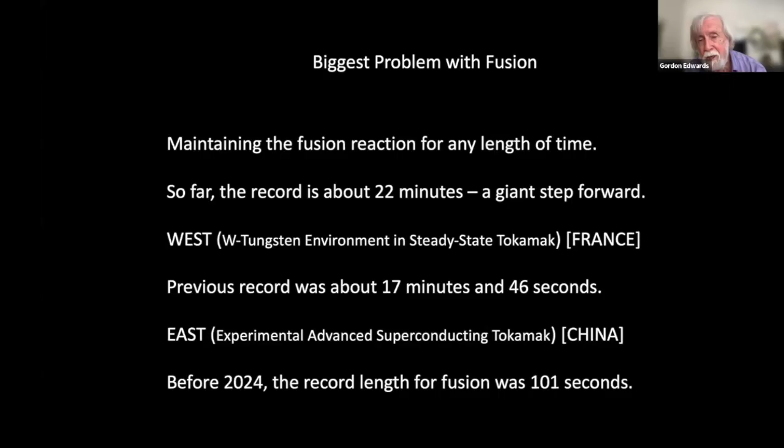In fact, we had a tokamak reactor just south of Montreal in a town called Varennes, and I asked the gentleman who ran that tokamak reactor to come speak to my class—I was a professor of mathematics and physics at Vanier College at the time. And he said that in his lifetime, he does not expect to see a fusion reaction being a practical reality.

And I think that pretty well brings us to the end of our show.

People really tend to downplay the potential for renewables. They're far more feasible than people believe.

Well, Dr. Gordon Edwards, it's hard to imagine that anybody could listen to your presentation, which was so fascinating, and still have it in their mind that nuclear energy is some sort of solution. I do have a couple of quick questions which we want to get to—we don't have a lot of time left.

One of the questions was, can you comment on high burn-up fuel dangers? Yeah, high burnup fuel is simply to get more power out of the same amount of fuel—the same kilogram of fuel. You do that by leaving it in the reactor for a longer period of time and enriching the uranium to a higher degree.